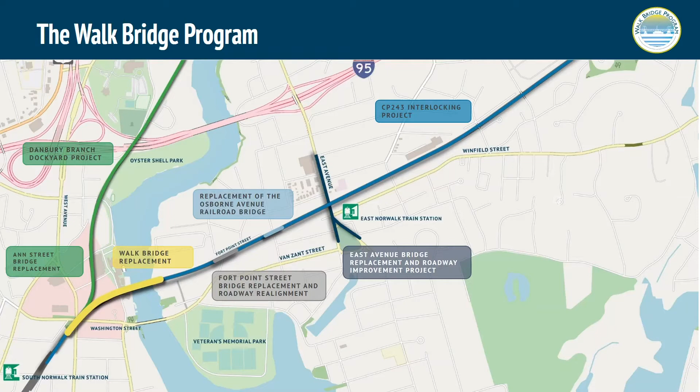So the Walk Bridge program consists of a multitude of projects in terms of upgrading the rail infrastructure throughout the area. Going from left to right, you'll see in the green, the work going up the Danbury Branch Dockyard project. That project is currently in construction and will be substantially complete this year. In yellow, you have the Walk Bridge project itself. The Walk Bridge program will include rail, track and catenary upgrades from the Walk Bridge all the way through Fort Point, Osborne, and East Avenue. And then to the far right, you see the 243 interlocking project. That project is also under construction. That will allow us to move trains from one track to another once we start construction. And all of these projects are being undertaken in the same duration to take advantage of track outages so that we can get all the work completed in a timely manner.

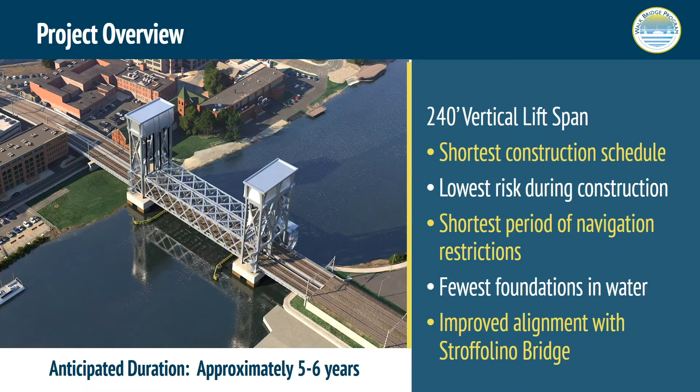So in terms of a project overview, the preferred alternative is a 240-foot vertical lift span. That was the alternative that came out during our alternatives analysis. You'll see on the far right, some of the advantages of this particular alternative in terms of construction schedule, navigation restrictions, as well as alignment with Stroffolino Bridge. The environmental approvals in terms of record of decision and the finding of no significant impact were completed in 2017. And right now we're anticipating a construction duration of approximately 5 to 6 years.

Now I'll turn it over to Lauren and she'll go through some of the details associated with the construction.

Thanks, Jim. So as Jim explained, the existing walk bridge is to be replaced with twin vertical lift spans. Each span will carry 2 tracks, allowing for the bridge to be built in stages. So we're able to maintain rail traffic throughout construction, as well as maintaining navigability as much as possible. To facilitate building the bridge in stages, we'll be constructing each lift span off-site and on a barge and floating it along the river into place for installation. The southern span will be installed first over a 96-hour period, and later on in construction, the north span will then be floated in and installed.

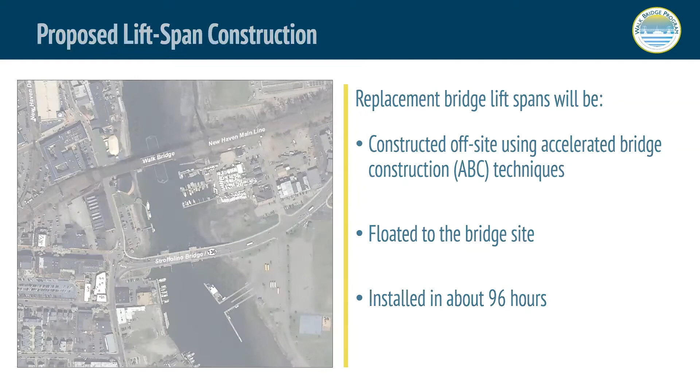Manresa Island has been identified as an alternative location to construct the lift spans and offers overall project improvements by moving construction activities away from the congested urban area. Manresa is about 2 nautical miles south of the walk bridge. Just like 68 and 90 Water Street, Manresa Island would be used for construction of lift spans and material storage. Manresa is the site of the decommissioned energy power plant.

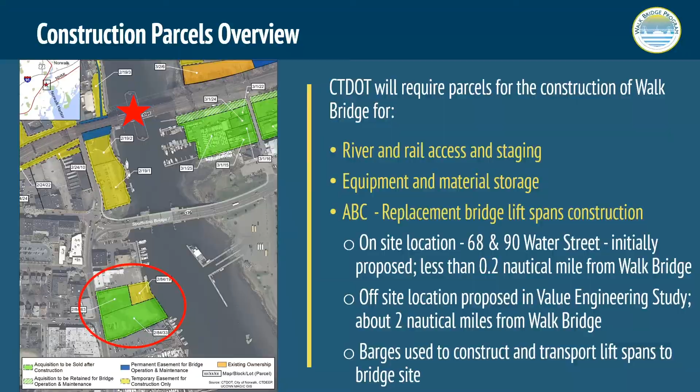This slide just illustrates the location of Manresa Island relative to the walk bridge construction site. It's just there at the mouth of the channel. The Manresa Island parcel is divided into a northern and southern parcel. The northern parcel use is limited to site access only.

Access would be from Woodward Avenue and Longshore Avenue, local roads that are primarily residential. Current traffic includes truck deliveries to warehouses located on Woodward, and Longshore Avenue is paved and wide enough to continue truck traffic. The southern parcel is where most of our use will occur.

It's a developed parcel with the former energy power plant located on site, and we won't be doing anything to the current layout of the site there in terms of removing buildings or anything like that. We plan to use a small portion of this site for staging and storage, and once the lift spans are constructed, they'll be floated onto site.

We plan to use both parcels for 60 months for access and material storage and potential vessel berthing in the existing slip. The active construction of the lift spans on a barge would take up to 48 months.

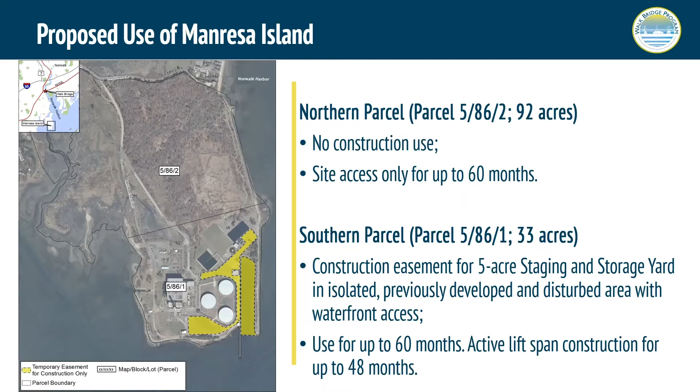In the figure you can see in tan the shaded access road leading down to the southern parcel, and in orange is our work area. Activities at this work area include pre-assembly of various structural components, possibly the lift span towers. We plan to fully assemble both of the lift span trusses on a barge located in the existing slip. We also may be berthing safety vessels and emergency rescue operations to support construction, as well as temporary berthing of other construction vessels and barges throughout the construction duration.

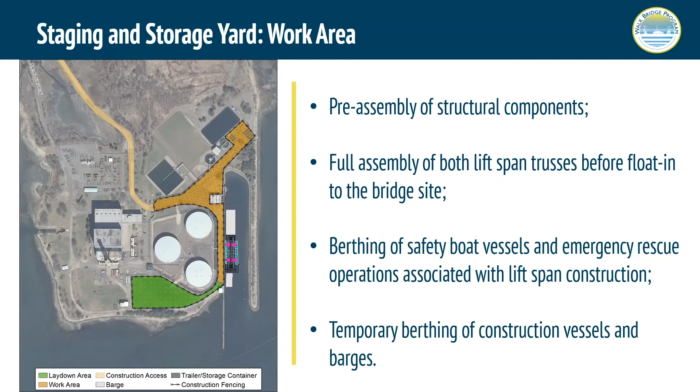The area shaded in green is what we're calling our laydown area. This section will be used for storage of materials such as pipe piles and girders, sheet piles for our marine enclosures where we'll conduct work within the river, including transfer of materials from trucks onto the barges.

We'll be doing temporary storage of components from demolition that are free from hazardous materials, such as stone masonry and concrete debris from the existing bridge. Material will be offloaded and transferred from barge to truck for off-site disposal. We are not anticipating any dredge material to be transported to or stored on this site.

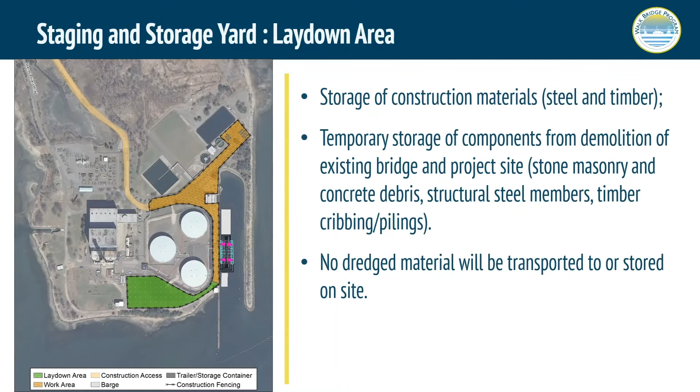To assess natural resources, a site evaluation was conducted by ConnDOT's Office of Environmental Planning to determine the potential for wetlands at the site. There are freshwater and tidal wetlands on the northern parcel and in the southern parcel north of the staging and storage yard, but no wetlands exist in the 5-acre area. There are intertidal flats along the western shore, but the project will not impact the intertidal area.

Manresa Island is located within the 100-year floodplain. There will be minor fill in the floodplain. Before work starts, the ground surface will be covered with 6 inches of crushed stone over geotextile fabric as a separation barrier between the staging and storage yard used and the previous areas of disturbance, and it will also level the surface for the work area.

The volume of fill within the tidal floodplain is not substantial enough to cause adverse impacts to the depth, velocity, or flow patterns during a storm surge event. Additionally, the project will not impact site groundwater.

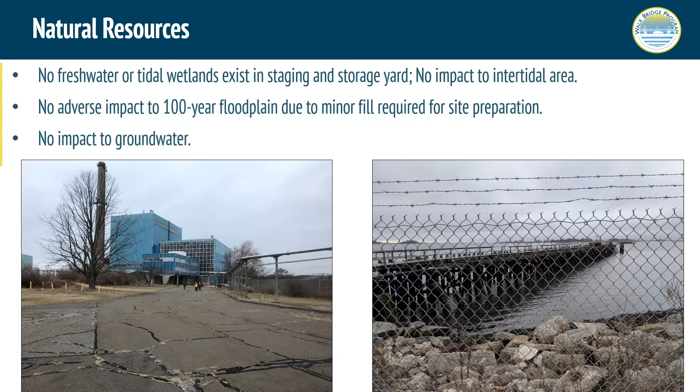Previous coordination with and reviews were conducted with the National Marine Fisheries Service for potential impacts to Norwalk River species and essential fish habitat, and it also included the Manresa Island area. The use of the existing dock and wharf area at Manresa will not create additional impacts to aquatic resources. Finally, the contractor has been directed to operate the barges to and from the site so that there will be no additional impact to the river bottom or increased turbidity.

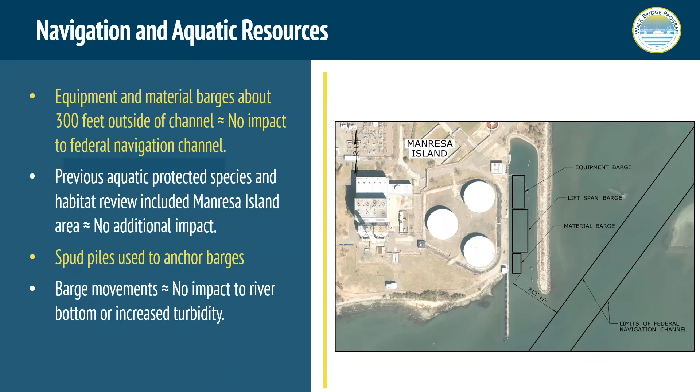ConnDOT evaluated the potential impacts of the staging and storage yard on the community. As Lauren cited, ConnDOT will acquire a construction easement from NRG Energy to use the site. The staging and storage yard will not impact existing land uses. After project completion, the site will be restored to pre-construction conditions.

Overall, there will be an increase in traffic to and from the site by about 25 round trips per day. The majority of these trips will be from employee use. Truck trips during peak lift span construction will be about 3 round trips per day and will generally occur Monday through Friday during regular business hours.

Woodward Avenue, the main route, currently supports truck trips to and from the warehouses that exist along the roadway. The additional 25 trips per day added to Woodward Avenue will represent less than 1% of the road's average daily traffic, using 2017 data.

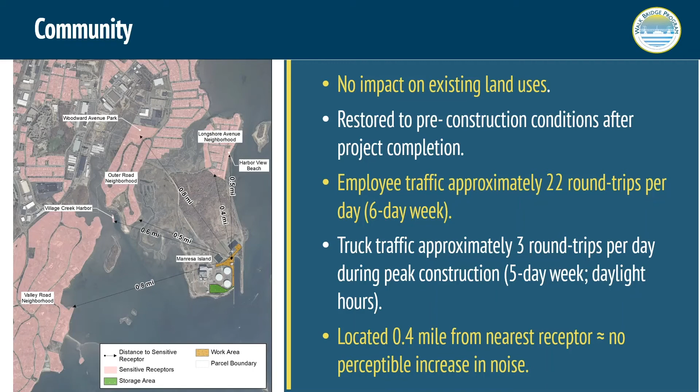This slide shows the minimization and mitigation measures that would be used throughout the site. Due to state listed species in the area, which has been determined through reviews with DEEP's Division of Wildlife, special protocols and time of year restrictions will be used to avoid impacts to their habitat. These protocols and restrictions will be incorporated into the permits and the contract specifications.

As mentioned before, to provide a separation barrier between the staging and storage yard activities and the site's previous uses, a 6-inch layer of crushed stone over geotextile fabric will be installed over the entire work area before construction starts. All fuels and hazardous materials will be securely stored in double-walled and flood-proof containers. Any lead-containing fragments from the existing bridge components will be stored in drums that will be removed at the end of each workday.

In the event of a forecasted storm, containerized materials will be moved off-site, and ConnDOT will prepare a flood contingency plan as part of the permit applications. Additionally, the site will be completely fenced with a secure entrance gate.

8 federal and state approvals and permits are needed for the Walk Bridge replacement project. The permits listed here will include Manresa Island staging and storage yard as a construction use parcel. ConnDOT is in the process of verifying this use with the FTA.